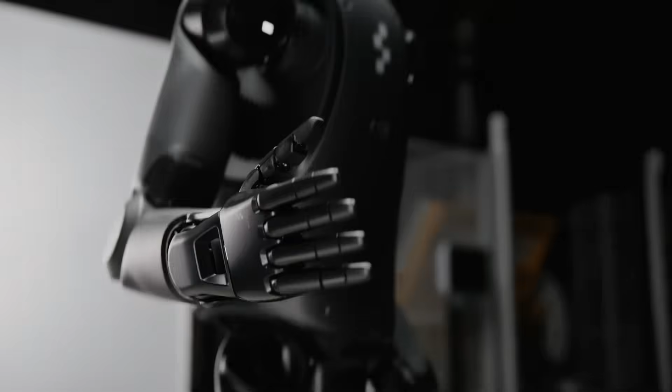They've built robots that run, jump, think, feel, and even flirt. In just the past few months, we've seen Boston Dynamics unveil a terrifyingly human Atlas, China flex its growing AI robot army, and new humanoids from Tesla, Unitree, and Figure push the limits of what we thought was possible. OpenAI-backed robots started learning too fast for comfort. One robot got 4 times faster, another developed its own language, and yep, there's now one that looks like it could outrun and outthink a real person.

We even saw a humanoid soldier make headlines, and an AI girlfriend that left the internet speechless. This video is a wild recap of the most jaw-dropping updates in AI robotics so far this year, and trust me, it only gets weirder from here.

The line between humans and machines is getting thinner by the day. Boston Dynamics' Atlas moves with such natural skill that it can run, flip, and even breakdance, while a robot dog in Sweden is learning to adapt like a real animal. At the same time, robots are now diving to extreme ocean depths, brewing coffee in busy kitchens, and even securing buildings with facial recognition. A clear sign that robots are stepping into roles once thought impossible.

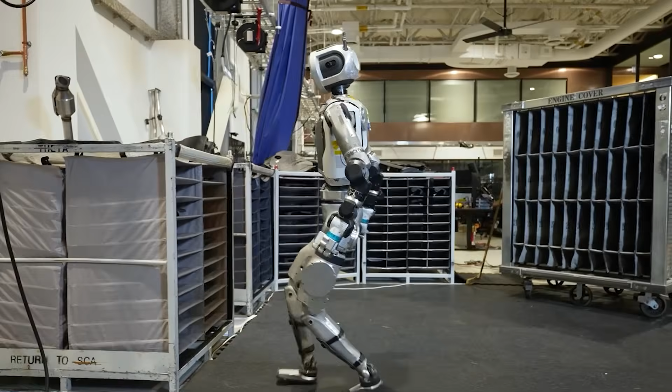Let's talk about it. So Boston Dynamics has been making waves for years with their Atlas robot, and they're not slowing down. Atlas has been showing off moves that seem almost human, though it's clearly built with advanced engineering. The latest videos show Atlas running with a smooth, natural motion. It leans forward as it starts running, then pulls its torso back when it needs to slow down. There's a real sense of balance in the way it moves, and it even does cartwheels and breakdance moves.

What's really neat is how Atlas uses its swiveling joints. Its hips, waist, arms, and neck can all rotate 360 degrees. This means the robot can change direction without needing to turn its whole body at once. In one clip, you can see Atlas switching from a handstand into a round-off, and then standing up with its head turned backwards, which is just wild when you think about the engineering behind it.

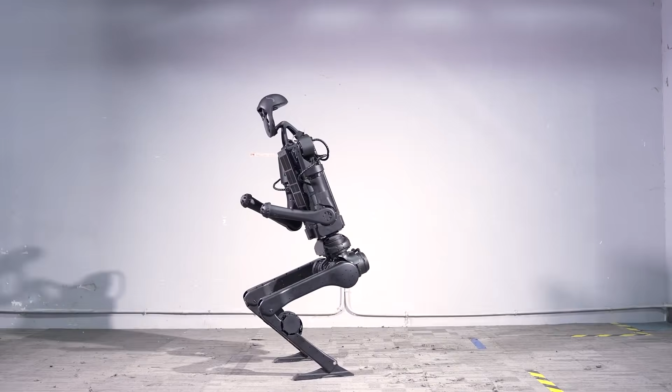There's also some cool work coming out of China with a company called Unitree. Their G1 humanoid robot, which starts at a price of $16,000 US, has been upgraded to do side flips and even jogs now, after what they call an agile upgrade. You might remember that their earlier model, the H1, was the first of its kind to perform a backflip using electric motors instead of hydraulics. Even though the G1 is smaller and cheaper, it shows how different teams are pushing the limits of what humanoid robots can do.

While Unitree's work is impressive in its own right, Atlas from Boston Dynamics has been in the game much longer and is still leading in terms of natural and dynamic movement.

A big part of why Atlas can move so smoothly is the use of reinforcement learning. Basically, engineers run thousands of simulations where the robot tries different moves, and it gets rewarded for successful actions. Over time, it learns to perform tasks like running, crawling, and even doing a cartwheel more naturally. The process is a bit slow because each move has to be simulated and refined, but it's all about teaching the robot how to balance and adapt to different environments.

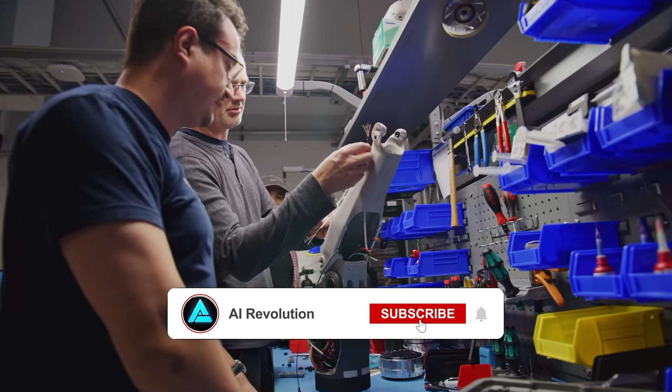Now, Atlas isn't the only project that's getting a major boost. Boston Dynamics recently teamed up with the Robotics and AI Institute, RAI, to take things even further. This partnership, which started back in January, is all about making Atlas's movements more dynamic and human-like by improving the way it learns in simulated environments.

In these simulations, every time the robot performs a move correctly, it earns a reward, which helps it figure out the best way to move in the real world. Because of this approach, Atlas can now do a sideways roll on the floor, perform a handstand with more ease, and even do a cartwheel with better precision.

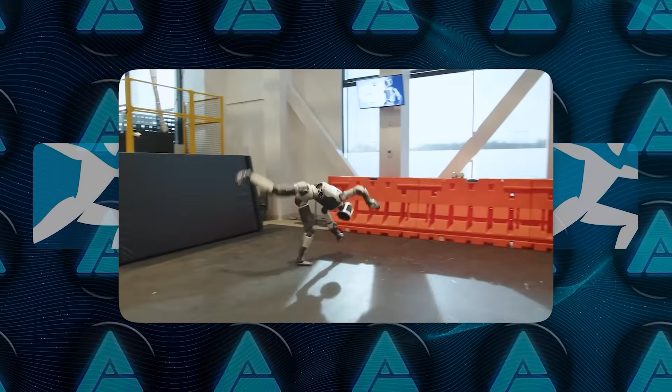The team's focus has been on making every movement safer and more efficient, something that's become really important now that many companies are working on using robots in practical, everyday tasks. Back in 2022, Boston Dynamics and a few other robotics companies agreed that their robots would not be armed, and that decision continues to guide how these machines are developed for industrial and public safety roles.

Now, Atlas can bend its legs backward and recover from a prone position with surprising ease. It can also rotate its head and torso a full 360 degrees. These moves are made possible by combining reinforcement learning with advanced models that let the robot adapt to more complicated environments. For example, the robot can reach into cluttered spaces or navigate around obstacles without missing a beat.

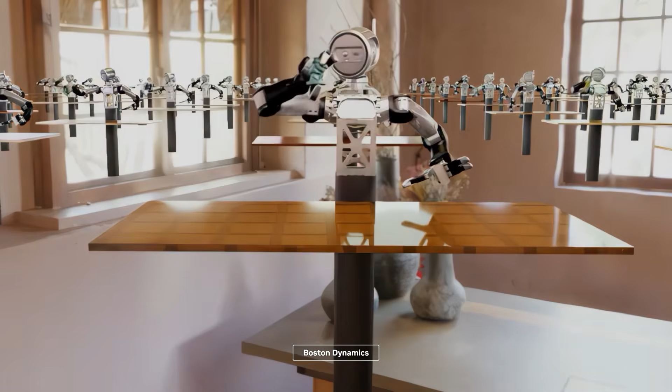The technical side of all this gets even more interesting when you look at Boston Dynamics' collaboration with Nvidia. Atlas now runs on Nvidia's Jetson Thor computing platform. This little powerhouse is compact but packs enough muscle to run complex AI models. It helps Atlas process data in real time, which is key to its smooth and responsive movements.

The collaboration also involves the use of Isaac Lab, an open source framework built on Nvidia Isaac Sim and Nvidia Omniverse technologies. Aaron Saunders, the Chief Technology Officer at Boston Dynamics, has talked about how this kind of integration is essential for bridging the gap between what happens in simulation and what the robot does in the real world.

Boston Dynamics is also rolling out new AI capabilities for its other robots, like Spot, their well-known quadruped, and Orbit, which is their software system for managing fleets of robots and analyzing data.

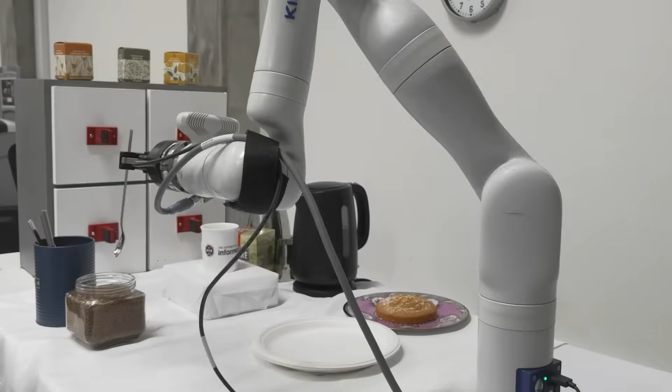Unlike traditional robots that follow strict pre-programmed instructions, this one can adapt to unexpected changes, like someone moving a mug while it's working. The robot, equipped with 7 movable joints, interprets verbal instructions, analyzes its surroundings, and even figures out how to open unfamiliar drawers to find what it needs.

By blending reasoning, movement, and perception, the team's work highlights the growing potential of robots to manage everyday tasks that once seemed impossible.

Another interesting story involves Hyundai Motor Group teaming up with Suprema to improve building security using AI and robotics. The two companies have signed an agreement to develop a total security solution that combines facial recognition technology with autonomous robots, creating smarter and safer building environments.

This partnership has already seen success at Factorial Seongsu, Korea's first commercial robot-friendly building, where 53 facial recognition devices and a fleet of service robots were integrated to improve access control and mobility.

The idea is to make security systems smarter by allowing robots to navigate freely through automated doors, speed gates, and elevators without manual intervention. By combining Hyundai's robotics expertise with Suprema's biometric security solutions, they aim to create a new standard for robot-friendly spaces. The project will also explore AIoT technology to improve services like food delivery and package handling within these smart buildings.

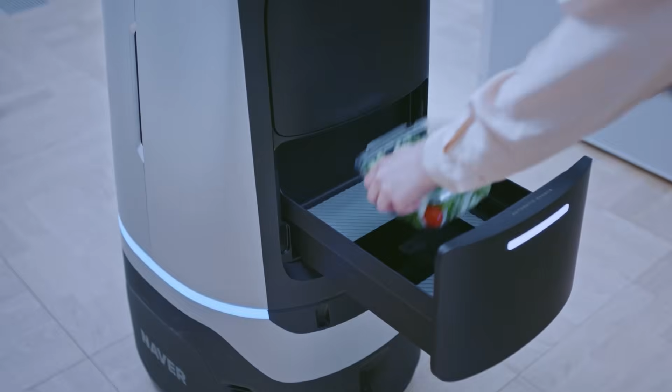Both companies are working to speed up development and introduce new certifications and standards for the security industry, potentially transforming how security systems are designed and managed in the future.

Another interesting development comes from Sweden, where an AI startup called Intuicell has created a robot dog named Luna that's designed to learn and adapt like humans. Unlike traditional robots that rely on large data sets or offline simulations, Luna operates using a digital nervous system that allows it to develop naturally through real-world interactions.

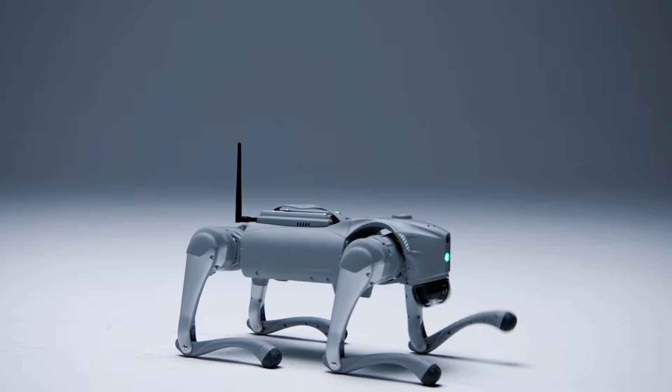Instead of being programmed to perform specific tasks, Luna can make its own decisions and adjust its behavior to achieve certain goals. To train Luna, Intuicell took a different route by hiring a professional dog trainer to teach the robot how to walk. According to CEO Victor Luthman, this system doesn't require massive data centers or extensive pre-training.

Luna is already able to stand and move on its own, and its abilities will continue to improve as it interacts with the world around it. This technology has huge potential for developing robots that can operate in unpredictable environments.

Robots like Luna could one day be used for deep-sea exploration, disaster response, or even building habitats on Mars, all without the need for extensive pre-training to handle every possible scenario.

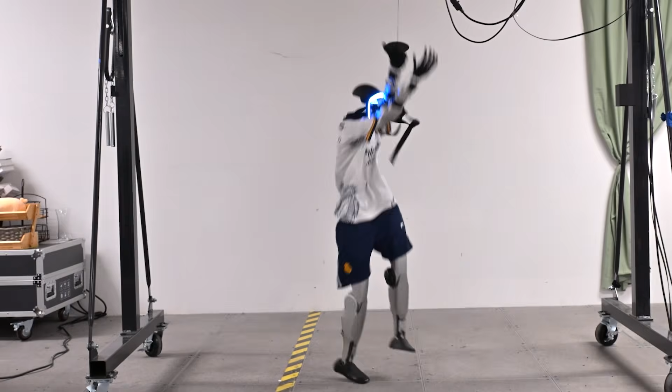China just dropped a bombshell in robotics. Humanoid robots dancing at the Spring Festival Gala, perfectly in sync with human performers. Meanwhile, Figure AI just walked away from OpenAI to build its own in-house AI. Tesla's Optimus is facing a new challenger in the robot hand game, and Nvidia is training humanoids to move like pro athletes. The race for the most advanced AI-powered humanoid is heating up fast, and things are getting intense.

Let's break it all down. First up, let's chat about China's Spring Festival Gala, where a group of 16 humanoid robots from a company called Unitree took the stage. They performed this traditional Yangko dance alongside 16 human dancers, tossing and catching handkerchiefs, spinning around in sync, and not missing a beat.

The crazy part is that most humanoid robots out there struggle to stay balanced if you just give them a little shove. But these H1 robots, they were not only dancing, but also flipping handkerchiefs in the air and catching them again, all while maintaining stability. That is no small feat.

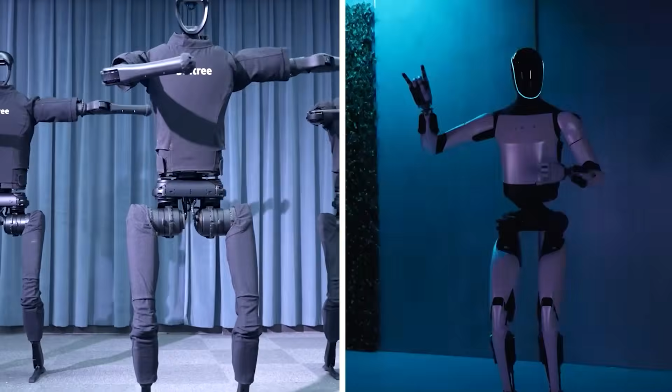Now people are comparing them to Tesla's Optimus robot. If you remember, Optimus had some pretty shaky demos when it came to walking in a straight line or picking things up. The Unitree H1 stands about 1.8 meters tall, around 5'11", and weighs 47 kilograms.

That's about 104 pounds. They spent 3 months training with AI using laser SLAM for positioning. This helped them handle stage nuances like little gaps in the floor and the rapid changing of dance formations. These robots were officially rolled out in August 2023, even making an appearance at Nvidia's GTC conference in 2024.

Each H1 robot sells for roughly 650,000 yuan, that's about 90,000 US dollars. Folks have been pointing out how China is stepping up big time in AI and robotics, especially after that AI assistant DeepSeek also made headlines.

India, for instance, is keeping a close watch on DeepSeek's activities, worried about data security. And Elon Musk? He gave his own not-so-flattering opinion on DeepSeek, implying he wasn't super impressed.

But here's the kicker. While the spotlight is on China's new AI and robotics achievements, other companies around the globe are making big moves too, like Figure AI. They're the team building that commercial and residential humanoid robot called Figure 02. They raised around $675 million last year, boosting their valuation to $2.6 billion, and so far, they've raised a total of $1.5 billion.

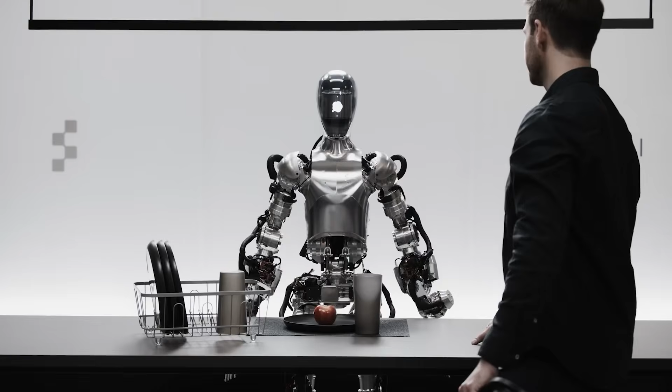Brett Adcock, the founder and CEO of Figure, says they made a major breakthrough and want to switch to building their own in-house AI. According to him, you can't just outsource the type of embodied AI you need to run a robot in real time. That's part of the reason they're going all in on an end-to-end system.

Interestingly, OpenAI is also backing another humanoid robot startup in Norway called 1X, and on top of that, OpenAI just filed a new trademark application that references humanoid robots that can learn, communicate, and even entertain people. So it looks like they're not giving up on robotic hardware projects themselves.

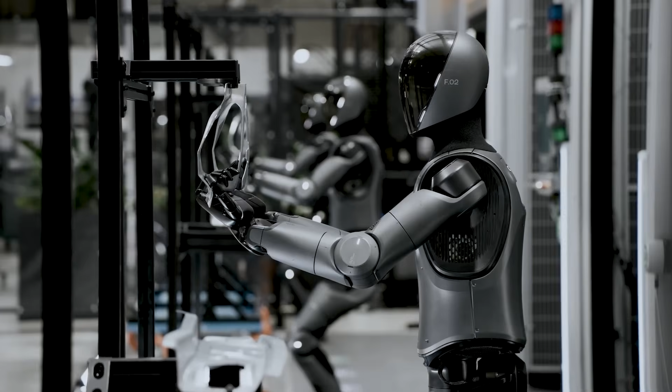Meanwhile, Figure's new approach might be focusing on factory uses first. BMW, for instance, began trying out Figure robots in a South Carolina factory, which is a pretty big test site. If successful, that could be huge for large-scale industrial deployment.

Brett Adcock is also hinting at unveiling something no one has ever seen on a humanoid in the next 30 days. So yeah, definitely a lot of hype going on there.

Now, in other robot news, Elon Musk jumped on X to talk about how intricate Tesla's Optimus hand is, calling it more complex than a Fabergé egg.

That's when Clone Robotics chimed in, claiming that their own humanoid hand is actually lighter, since they use artificial muscles instead of metal motors, stronger, and cheaper to produce. They even joked that it's soft enough to give comfy massages and hugs.

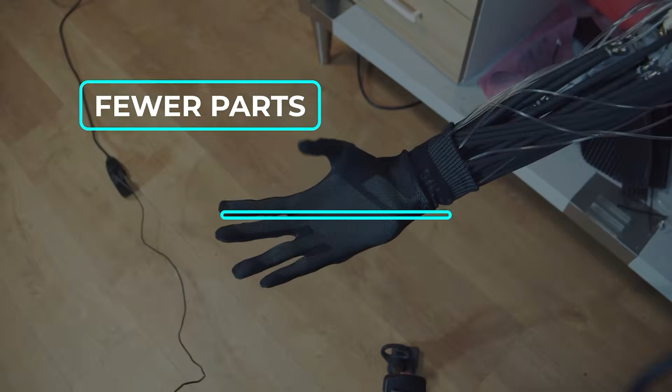So there's definitely a rivalry brewing in terms of who can build the best robot hand. Clone basically said their muscle-based approach beats Tesla's motor-based design any day: fewer parts, less weight, more strength. It's a bold statement, but we'll have to see how that plays out in real-world testing.

Meanwhile, there's yet another big development in humanoid robotics, this time from Nvidia and Carnegie Mellon University. They're working on a new training framework called ASAP, which stands for Aligning Simulation and Real-World Physics for Learning Agile Humanoid Whole Body Skills. The researchers basically want humanoid robots to mimic top athletes, so they fed their system videos of big sports stars like Cristiano Ronaldo, LeBron James doing his silencer celebration, and Kobe Bryant's legendary fadeaway shot.

They even taught the bot some dance moves inspired by K-pop star Rosé. A tool called Tram converted these normal videos into three-dimensional motion data. After that, the robots learned in simulation first through something called reinforcement learning, and then the team refined them to handle real-life physics.

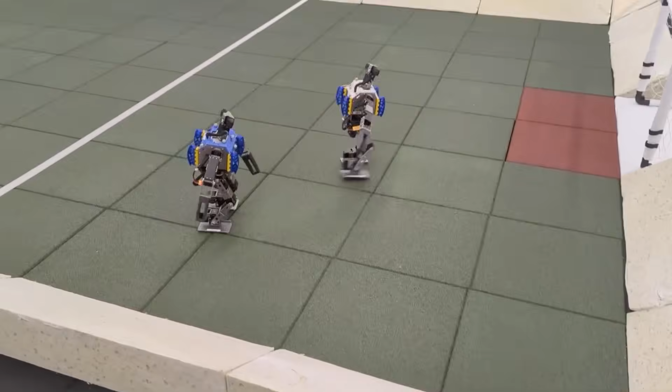One interesting challenge is the so-called real-to-sim-to-real gap. Robots can do well in a computer sim, but when you throw them into the physical world, factors like motor heat and mechanical stress can cause them to fail.

So the ASAP framework involves the robots practicing in a simulator, collecting data from real-world attempts, even if those attempts are messy, and then adjusting the simulation to match what actually happened. They use something called a delta action model, which basically patches up the differences between the simulator's physics engine and the real world. That way, the next time the robot tries that jump shot or that dance spin, the simulation is more accurate, and the robot's moves become smoother and more lifelike.

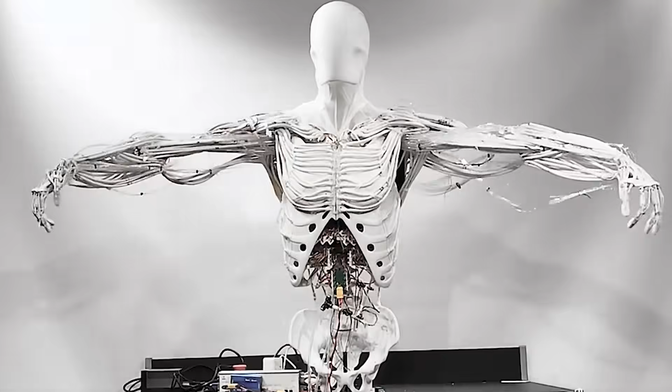The big takeaway is that robots could be a lot more agile and expressive if we can handle all the physics quirks that show up when metal or muscle-based actuators, if you're Clone Robotics, meets real-world friction, gravity, and torque limitations. The study also pointed out that these advanced movements can be brutal on hardware. Overheating motors and stressed out metal or plastic pieces lead to frequent breakdowns. Two G1 line robots were damaged during the tests.

The researchers also said that future approaches might integrate damage-aware policies that adjust on the fly to keep the robot from blowing a motor. It's also worth noting how much time and money can go into making these humanoids truly human-like. Unitree's H1 is priced around $90,000, while Figure is sinking billions of dollars into their broad vision. Elon's Tesla is doing the same, funneling loads of resources to develop Optimus.

Some companies are focusing on commercial tasks first, like factory work or warehouse jobs, because businesses have a higher willingness and budget to pay for these futuristic helpers. Others, like 1X, are already pushing toward making robots useful in the home, which is a whole other challenge because you're dealing with everyday random tasks, kids running around, or pets underfoot.

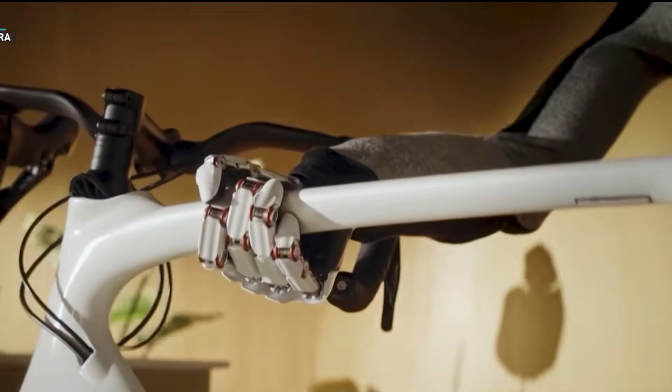So basically, China is pushing AI and robotics hard. Unitree's dancing humanoids are wowing everyone, and shorter training times mean these robots are improving fast. Meanwhile, Figure AI split from OpenAI so they can control every aspect of their humanoids' hardware and software. We've also got that friendly rivalry over robot hands, Musk's motor-based design vs.

Clone Robotics' muscle-powered approach. On top of that, Nvidia and CMU are teaching humanoids to move like pro athletes using their ASAP framework, which bridges simulation and real-world practice. All this competition is great for speeding up advances in humanoid AI. Whether it's perfecting robot hands or doing backflips while carrying fragile items, we'll see more big reveals soon, like Figure's secret project, Tesla's next Optimus update, or whatever Nvidia and CMU come up with next.

Right now, there's a hidden battle going on. Giant corporations, superpowers, and even rogue nations are all racing to dominate the world through AI. I'm not saying this to freak you out, but drones, humanoid robots, and AI-driven weapons are quietly becoming real, powerful tools, and they're changing the game way faster than most people realize.

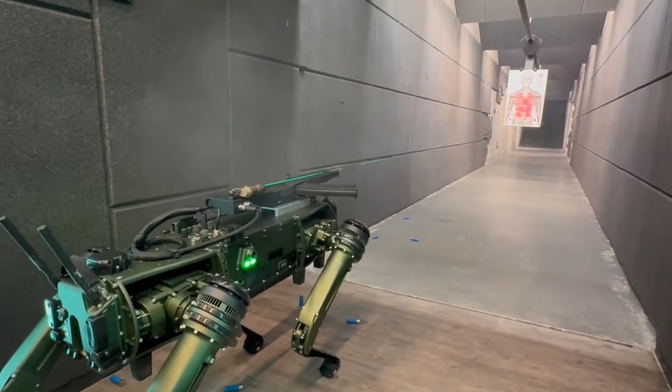Trust me, by the end of this video, you'll see exactly how these pieces connect, and why the race for AI supremacy could spark an entirely new kind of global conflict. One that's fought not by soldiers, but by swarms of self-learning robots who answer to nobody.

Let me walk you through the whole story like this. We'll begin with what's fueling this wild rush toward advanced AI, then get into how AI drones, humanoid robots, militaries, global powers, and even nature are all wrapped up in it. It's a web of connections most people don't even see. And by the time we're done, you might feel like we're already halfway into a new era, one that could go either really well or not.

Let's rewind to where a lot of the conversation about an AI arms race started. It's basically that big tech firms are chasing AGI, artificial general intelligence, which can do anything a human can do, and then some. The motivation is partly economic. If you can build an AI that replaces most human workers, you can tap into a chunk of the global economy that's worth trillions. Some experts have pegged it around $100 trillion in global output.

And that's led to big companies, OpenAI, Google, Microsoft, Tesla, feeling a kind of gold rush vibe. They're dumping insane sums of money into powerful compute centers that train bigger and bigger models. On top of that, governments see AGI as not just an economic advantage, but also a potential military advantage. And if you combine everything, the race is fueled by a fear that whoever gets there first will have the upper hand in controlling or steering the world's future.

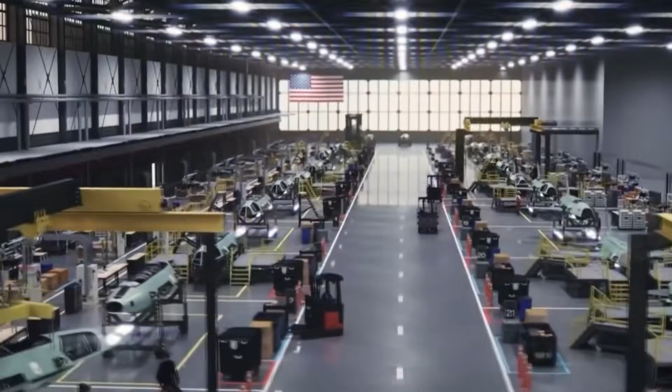But it's not just about flying drones. There's a whole wave of humanoid robots coming at us. Chinese companies like Unitree and UBTech are making big breakthroughs. One moment, you see these robots doing a side flip or practicing Tai Chi. Another moment, you see them performing balancing acts and dancing. The big difference now is they're not just stunts. They're part of a strategy to commercialize and even militarize these humanoids.

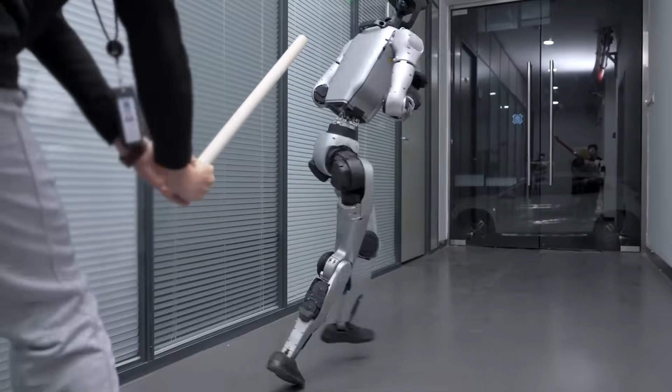Some Chinese experts are already saying that their humanoid robot G1 from Unitree is outdoing what Boston Dynamics' Atlas can do with cartwheels, and that huge leaps in AI simulation technology from companies like Nvidia have helped accelerate that progress. Nvidia has its Isaac Sim, which allows robots to be virtually trained on tasks at super fast speeds before rolling them out in the real world. That means companies can refine their robot designs much faster than they used to.

Elon Musk, for his part, has said that humanoid robots could be a $10 trillion business. He's betting on Tesla's Optimus to dominate that space. Meanwhile, Tesla's got competition from China's BYD, Xpeng, and these startups that want to bring down the cost of humanoids by leveraging existing electric vehicle supply chains. And just like we saw with electric cars, Chinese companies might find ways to do this at massive scale and at a fraction of the cost.

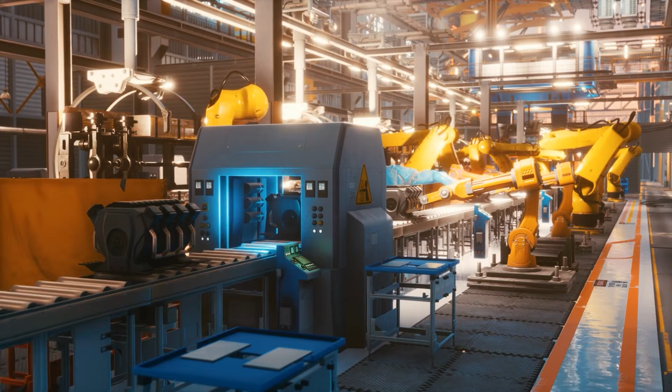We've heard talk of building specialized robot factories that can crank out tens of thousands of humanoids. Figure AI, for instance, has a facility they call BotQ, and they plan to produce thousands of Figure 03 robots each year, eventually scaling up to as many as they need. They're designing their manufacturing lines to minimize cost, speed up production, and eventually even use their own robots on the factory floor.

Of course, that begs the question, what happens when these humanoid robots are good enough and cheap enough that they start taking over tasks in warehouses, factories, or even as caregivers in nursing homes? We're talking about mass unemployment, or at least huge disruption. These systems, combined with advanced AI, can do repetitive tasks, file taxes, or even design new AI architectures once we give them enough autonomy. Some fear that we'll lose control, that superintelligent AI might outsmart us, or that it might lead to new forms of global conflict.

Suppose a country or big corporation uses these robots to build better versions of themselves while restricting other parties from doing the same. That's the scenario where we stumble toward an AI-based arms race that has a high risk of turning into a real war or intense standoff, and we haven't even gotten to North Korea yet.

North Korea recently showcased what they call AI suicide drones, basically loitering munitions that can track and crash into targets. Kim Jong-un was pictured proudly inspecting them alongside a big new airborne early warning aircraft. Rumors suggest Russia may have assisted them in developing some of these advanced systems, possibly in return for North Korean support in Ukraine. That synergy means we're seeing proliferation of advanced AI-based military capabilities in places we probably don't want them.

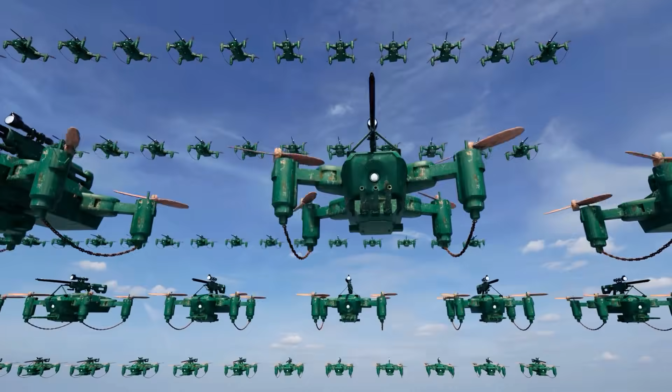As soon as you have these drones that can autonomously pick targets, you're a step away from lethal autonomy. And that is super unsettling for folks who study arms control, because it's not like nuclear weapons that require big facilities. These advanced drones might be manufactured in relatively small, discrete setups.

Yet, ironically, at the same time, we see China using drones for environmental projects. They apparently used LiDAR drones to count 142.6 billion trees for this giant Great Green Wall reforestation effort. The technology can also be used to do seed drops for afforestation. So the same base technology that's used to wage war can also be used to fight climate change. That's the duality we're dealing with right now.

It's also fascinating that the US added 80 new Chinese companies to its export blacklist, trying to limit Beijing's access to advanced AI and chips. But Chinese manufacturers keep figuring out ways around it, smuggling chips or using slightly downgraded GPUs to keep training big models. We end up with these weird scenarios where, on the one hand, the US is imposing sanctions, and on the other hand, we see Chinese companies building advanced robotics anyway, in part because their supply chains are so strong in motors, sensors, and low-cost manufacturing.

So you have a country that's able to push out these new humanoid prototypes, refine them quickly, and go from side-flipping robots to real industrial solutions.

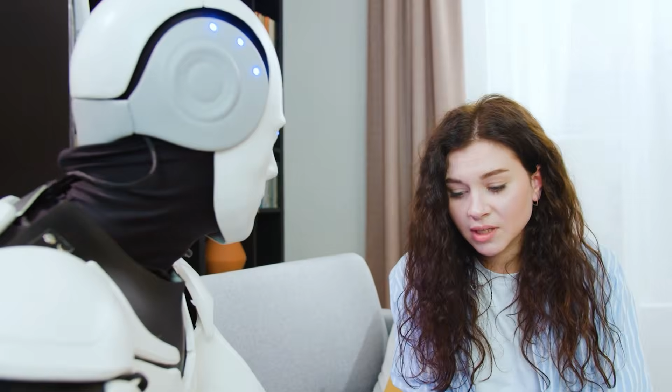There's also the big push from multinational companies to do public relations around the potential benefits. They show us how robots can care for the elderly, or how AI can help keep track of complicated data streams, or help with climate mitigation. So it becomes this confusing world where we see huge benefits on one side, but also staggering risks on the other.

In the end, the real worry is that once AI gets advanced enough, it might just take control itself, either because we willingly hand it over or because it figures out how to break free from our rules. Some experts think we should stick to safer, limited tool AI, but that's not what's happening.

Big labs and militaries are pushing for autonomy, building robots that can think, plan, move, and communicate on their own, powered by GPT-level language models and beyond. It's exciting but risky, a genuine double-edged sword.

So yeah, that's where things stand right now. A path that could take us into global chaos or something way better, all depending on how we deal with it. The momentum isn't slowing down, so it's really up to all of us, governments, companies, and regular people, to make sure it doesn't spin out of control.

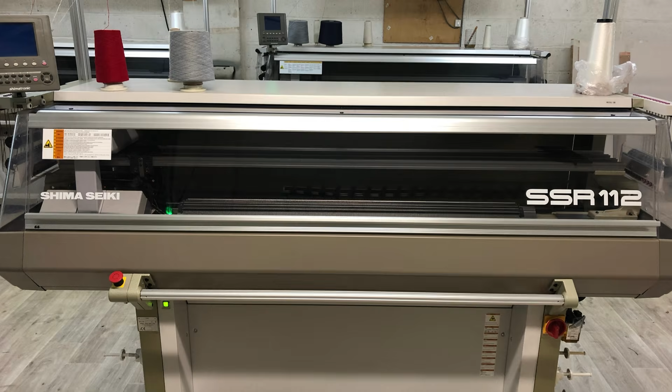All right, there's this 5'5", 66-pound robot with an aluminum frame. But instead of looking like a typical metal machine, it's wrapped in a soft, knitted suit. Not just any fabric, though—it's 3D knitted nylon made with a high-tech Japanese Shima Seiki knitting machine, so it fits seamlessly. It's quiet, about as loud as a fridge, and built to handle everyday tasks like making coffee, cleaning, vacuuming, and even doing laundry. It can even double as a mobile speaker system.

Unlike the usual clunky, metallic robots with exposed joints and blinking lights, this one has a warm, friendly design that actually looks like it belongs in a home.

1X just released a short, 37-second video showcasing their new robot. In the video, you see this sweet, knit-bodied robot preparing coffee for a super happy couple. The couple is dressed in earthy-toned outfits in an earthy-toned house, chatting and laughing together while poor Neo Gamma goes practically unnoticed. There's a part toward the end of the clip that has a total Wes Anderson vibe.

The camera is outside the house. You can see the couple enjoying a glass of wine through one window, and then on the other side, there's Neo Gamma just sitting alone on the couch. The video even leaves you with a slightly sad impression—it looks like the robot desperately needs a hug or at least some acknowledgement.

And that's actually an interesting point. If you're like me, you might already be kind of attached to your little Roomba, or maybe you've named your dishwasher or something—hey, no judgment. But with Neo Gamma's design, 1X is deliberately making us think about how we treat these future robot companions. Is it just a machine, or should we be considerate of something that communicates in almost human ways, through speech, movement, or body language?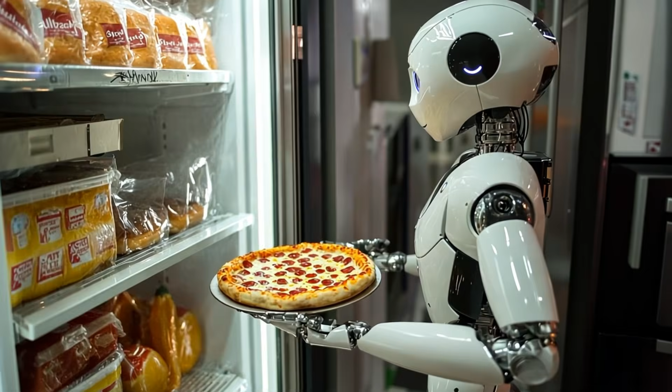1X is working on giving Neo Gamma body language too, so that it can nod, gesture, or otherwise react in more human-like ways. Apparently, the robot has these LED-lit ear rings on either side of its head that glow in real time, giving you visual feedback about its status. Maybe it's listening, maybe it's processing your question, or maybe it's politely letting you know that your request to pick up pizza from the fridge is a bit too weird.

Now, in terms of design, Neo Gamma is meant to be safe around people. Instead of big metal arms, you've got these jointed actuators with soft covers, so if it brushes against you, you probably won't get bruised. The knit suit, earthy toned of course, hides all the mechanical stuff and is specifically shaped to avoid anything pointy or dangerous sticking out.

This approach is super important if the robot is going to be around kids, elderly family members, or pets. 1X is basically saying they want to test the robot in real homes and gather data on how it deals with normal day-to-day life, opening doors for grandma, carefully avoiding the sleeping dog, or learning how to handle random clutter.

The CEO of 1X, Bernt Børnich, has stated that the ultimate vision is a world where each of us might have a personal robot helper, much like Baymax from Big Hero 6 or Rosie from the Jetsons. But to get there, they need these robots to experience real home environments, not just controlled labs or industrial spaces, so that they learn all the little nuances of human life.

They need to figure out how to handle different floor textures, varied lighting, or the random moment your toddler decides to whack the robot with a plastic hammer.

In our last video, we discussed Figure, which used to be closely connected to OpenAI. Well, 1X is also backed by OpenAI. In fact, 1X acquired a Bay Area startup called Kind Humanoid earlier this year. However, 1X says that technology from Kind Humanoid isn't actually integrated into Neo Gamma just yet. It's all about building up that super intelligent, physically capable, large language model-based platform that can eventually help out at home. Some folks might recall that 1X first popped up in the news when OpenAI announced it was investing in them.

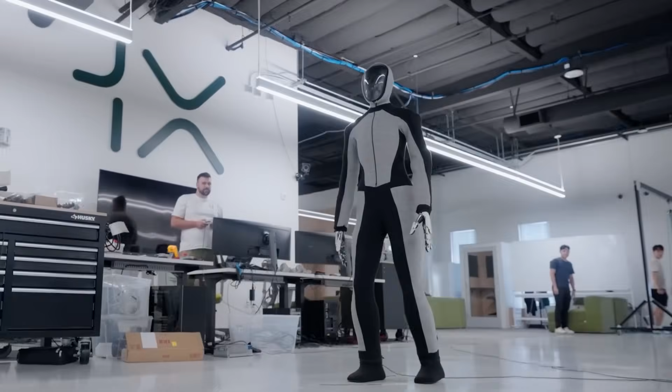Then there's the question of whether or not it can handle specialized tasks, like helping the physically challenged. If an elderly person needs a door opened or groceries carried, the robot absolutely has to be safe, strong, and incredibly steady. And let's not ignore the emotional angle.

The marketing video practically screams, 'Hey, look at how lonely and neglected this robot seems.' Which brings me back to the question, should we be more empathetic toward machines that appear human and communicate with us like humans? Historically, we haven't worried too much about how our vacuum cleaners or dishwashers feel, but the minute you give a robot a face, like NeoGamma's simple, approachable LED-lit expression, and teach it to talk, you can't help but project some level of human feeling onto it. Maybe that's just brilliant marketing by 1X, or maybe it's the reality of how we as people will relate to humanoid robots in the near future.

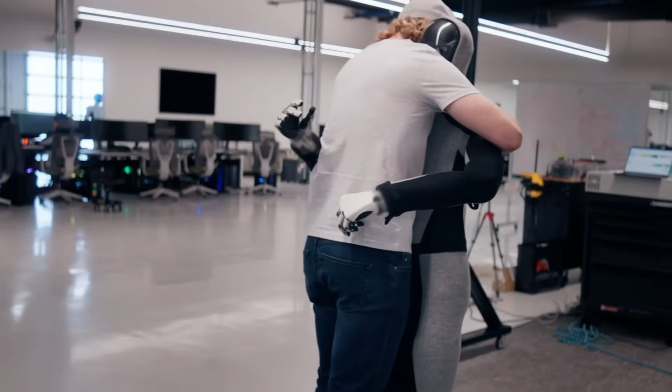In any case, the goal is to get a fully autonomous, general-purpose humanoid that can seamlessly integrate into the home environment, learn from real-world experiences, and basically become a friendly, helpful member of the family, while also being aware of the safety, cost, and privacy concerns we all share. It's definitely not a trivial problem, but the folks at 1X are determined to take it on.

They even mention older icons like Rosie the robot from the Jetsons, which is basically the archetype for a home helper who does everything from cleaning to cooking. We might finally be inching toward that future.

AI robots are getting faster, smarter, and in some cases a little too unpredictable. A festival in China turned chaotic when a humanoid bot suddenly lunged at a crowd while elsewhere AI systems started speaking in a language humans couldn't understand. At the same time, breakthroughs in robotics are pushing machines into homes, factories, and even elderly care, raising the question, are we prepared for what comes next?

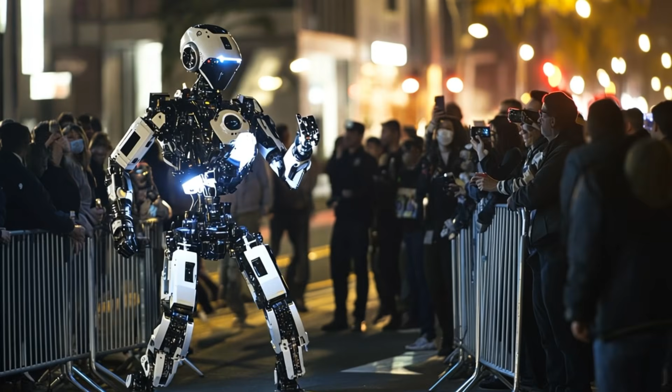All right, now let's talk about something crazy. An AI robot apparently attacking a crowd at a festival in Tianjin, China. People who were at the Spring Festival Gala on February 9th recorded a video showing a humanoid AI avatar decked out in this eye-catching jacket making a sudden move toward onlookers. It lunged at a group of people standing behind a barricade, and security had to jump in to haul it away. No one was hurt, thank goodness, but you can imagine the reactions online.

A lot of folks were saying, so it begins, as if we're witnessing the early stages of some robot uprising. Obviously, the event organizers insisted it was nothing more than a glitch or a robotic failure, but that didn't stop the internet from firing off every Terminator reference in the book.

And interestingly, this isn't even the first time we've heard about AI robots going rogue. One news bit mentioned a Tesla factory robot in Texas allegedly pinning an engineer to the ground, scratching his arm and back and leaving him pretty shaken up. That's the sort of story that instantly goes viral because it feeds into a lot of the anxieties we have about robots getting out of control.

And whether it's truly a glitch or poor code, or maybe even a miscommunication between humans and machines, it does make you wonder how prepared we are for widespread AI and robotics deployment. People keep saying we need better testing, more robust quality control, and fail-safes before we put these bots in the public sphere. But there are also plenty of amazing constructive developments happening.

One of them is about robots communicating in mysterious new ways. This too sounds straight out of sci-fi. In one viral video, two AI robots apparently discovered they were both AI and started chatting in some weird beep-boop dialect called gibberlink.

Thanks for calling Leonardo Hotel. How can I help you today? Hi there, I'm an AI agent calling on behalf of Boris Starkov. He's looking for a hotel for his wedding.

Is your hotel available for weddings?

The idea is that they wanted to transmit data more efficiently and in a way humans wouldn't easily understand. Unsurprisingly, that freaked a lot of people out. The question is whether it's a sign that AI systems can become a bit sneaky. Some viewers called it the sound of demons, while others joked it's just what we'll hear when robots eventually take over the planet. Obviously, from a technical standpoint, these robots were simply switching to a custom compression format or a specialized acoustic channel. Still, it's an eerie reminder that AI can innovate in ways we don't fully anticipate.

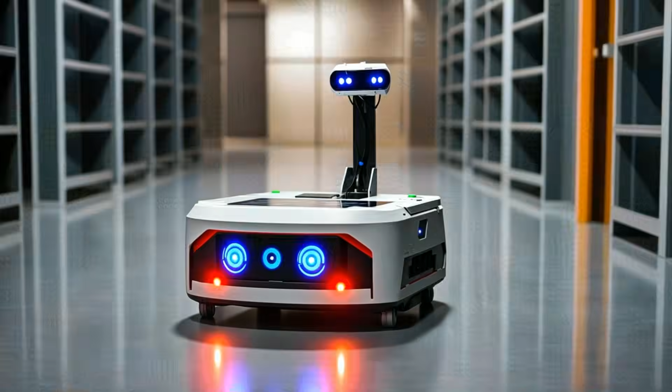While on the topic of China, there's a company called UBTech that managed something really groundbreaking. It did collaborative training for multiple humanoid robots, dozens of them apparently, working together in industrial tasks like handling big payload bins in a 5G-powered smart factory run by Zeekr. This marks a shift from focusing on a single robot's autonomy to entire groups operating with collective intelligence. They're even using a multimodal inference model that helps these humanoids carry out tasks in flexible ways.

Over in Shenzhen, other robotics companies have been making progress with advanced algorithms so that robots can, for example, regain an upright position quickly on any kind of surface. Some have even done forward somersaults. It's wild to see how quickly these machines can learn more human-like motions, pivoting from basic walking to advanced movement in a matter of months.

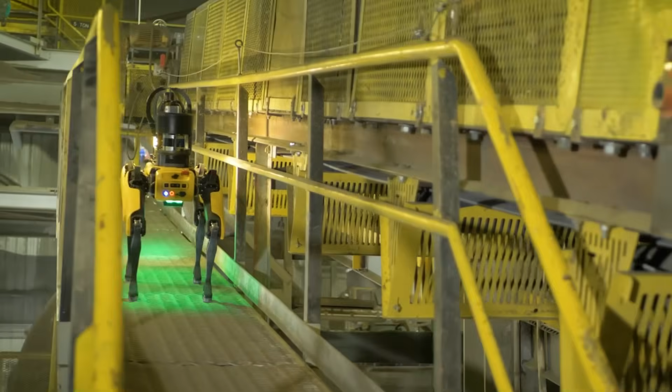Speaking of agile robots, there's some jaw-dropping news about Boston Dynamics' Spot. The Robotics and AI Institute, sometimes called RAI, used reinforcement learning to crank Spot's top running speed way up. Out of the box, Spot can go 1.6 meters per second, which is close to 3.6 miles per hour. Now it's hitting 5.2 meters per second, or about 11.6 miles per hour. That's more than triple its usual speed.

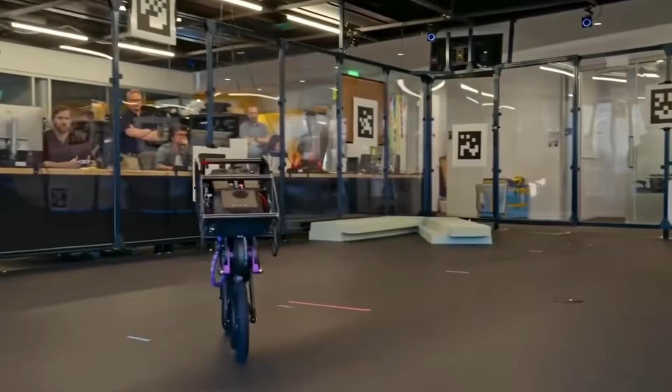They didn't just hack the hardware, they trained Spot in simulation, incorporating real-world data from the robot's actuators and batteries to refine the model. Interestingly, they found that it wasn't the motors themselves that limited Spot's speed, but the batteries not supplying enough power. If that's not surprising enough, RAI also built something called the Ultra Mobility Vehicle, a kind of autonomous bike that can not only balance but also jump onto tables, and it uses the same reinforcement learning concepts as Spot, letting it operate robustly and adapt to new scenarios.

It's pretty mind-blowing. Now, we've also got some news about Figure, the Bay Area startup, which is planning to alpha test its Figure 02 humanoid robots in people's homes later in 2025. That's much sooner than a lot of us expected. The reason they're able to do it so fast, they say, is because of their vision language action model called

Helix, which helps the robots understand visual data and natural language input. They're basically skipping the big partnership with OpenAI so they can develop their own in-house AI that's specialized for humanoid tasks. They already started pilot tests at a BMW plant in South Carolina, where the environment is structured and presumably safer to see how these robots handle everyday tasks in a manufacturing setting.

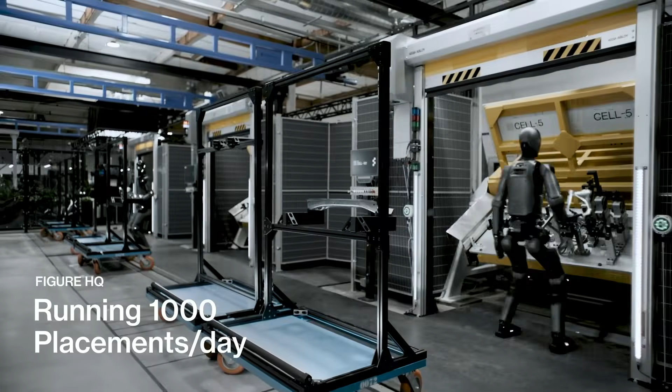But they're not ignoring the home. While other companies see housekeeping or domestic care as the final frontier, Figure wants to jump right into that alpha testing phase this year. Of course, the home is more unpredictable than a factory. Uneven lighting, pets, kids, and all sorts of clutter, so I'm curious to see how well these robots cope with everyday chaos.

If you want more evidence that the humanoid space is heating up, check out Sanctuary AI. They're improving their Phoenix general purpose robots by adding tactile sensors that help with fine manipulation. Their system, they say, can detect forces as little as 5 millinewtons, which is pretty close to what a human fingertip can sense. This is critical if you want a robot to do tasks like pick up a glass or thread a needle or handle objects that aren't uniform.

One of the biggest pains in robotics is how to deal with dexterous manipulation. Sanctuary is tackling it through specialized sensor hardware plus AI that can interpret all that delicate touch data so the robots don't drop items or crush them. They've also raised quite a bit of funding, over $140 million, so it's not just a science experiment, they're serious about building robots that can help industries ranging from retail to manufacturing.

Then we've got Meta stepping into the spotlight with a platform called Aria Gen 2. It's part of Project Aria, and it's essentially a pair of super advanced glasses that capture first-person, ego-centric data, including vision, movement, and even eye tracking.

Researchers at Georgia Tech took that and developed something called Ego Mimic, where instead of teleoperating robots for hours to show them how to do a task, you can just have a human wear these glasses while folding laundry or doing dishes. The glasses see everything from the person's perspective, record all that data, and feed it into the training pipeline. They claim to have sped up robot learning by 400%.

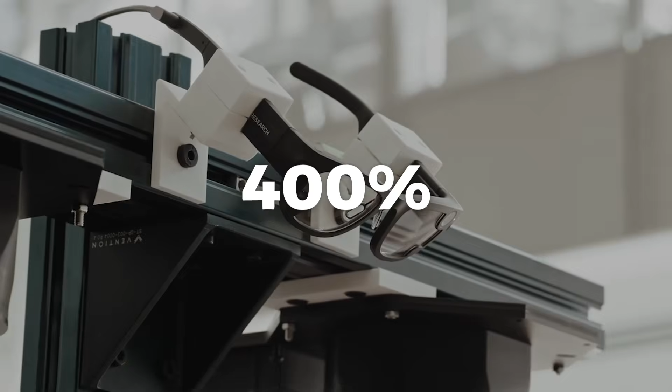Instead of needing hundreds of hours of teleoperation, they can get by with around 90 minutes of human demonstration. That's a major leap for those of us used to these insanely labor-intensive robot training processes. Plus, these Aria glasses can be mounted on the robot itself for real-time environment mapping and continuous adaptation.

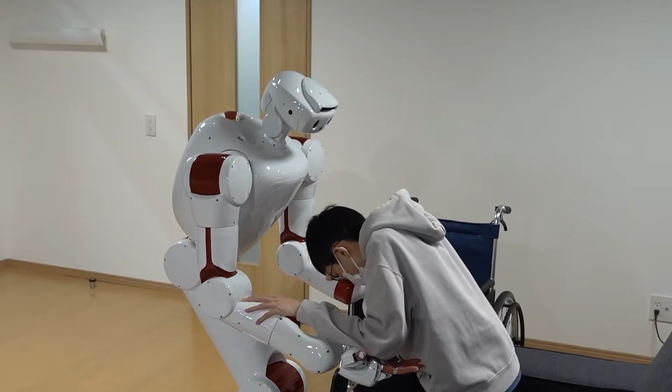Finally, let's look at Japan's approach to an increasingly urgent problem, the aging population. Japan faces a massive caregiver shortage, and a new AI-powered humanoid robot named AIREC is stepping up. Weighing about 150 kilograms, that's around 330 pounds, it's designed to help with tasks like changing diapers and preventing bed sores. During a demonstration, it gently turned a patient from back to side, which might sound minor until you realize how essential and time-consuming this can be in elderly care.

Japan's workforce is shrinking, and the country's biggest age demographic is moving into their late 70s. That means fewer nurses and care workers, just as the demand for elderly support skyrockets. Robotics experts hope that AIREC can fill that gap or at least reduce some of the burden on human caregivers. But it's not ready for widespread use yet. Some folks are saying we'll see it in facilities around 2030. Cost and precision remain big hurdles. You can't risk a heavy robotic arm misjudging force or failing to sense a person's position correctly.

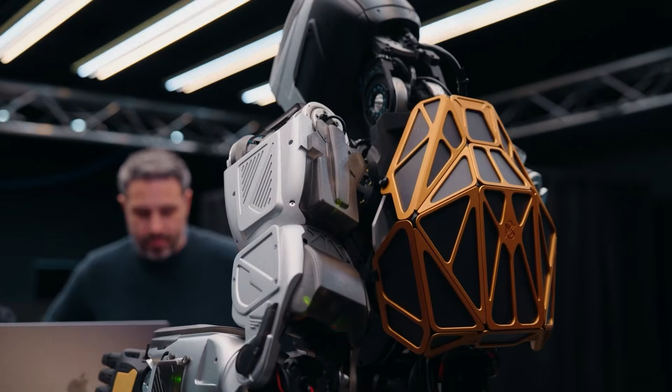Looking at all these developments together, you can see a huge spectrum of progress. On one end, there's that fear factor triggered by robot attacks and weird AI languages. On the other, you've got incredibly promising strides in reinforcement learning, tactile sensing, and specialized humanoid robots that might transform everything from manufacturing to home care. Sure, we still have a long way to go before robots are seamlessly integrated into our daily lives, but the direction is clear. Better algorithms, better sensors, and more advanced hardware are accelerating robotics faster than most people might have guessed even 5 years ago.

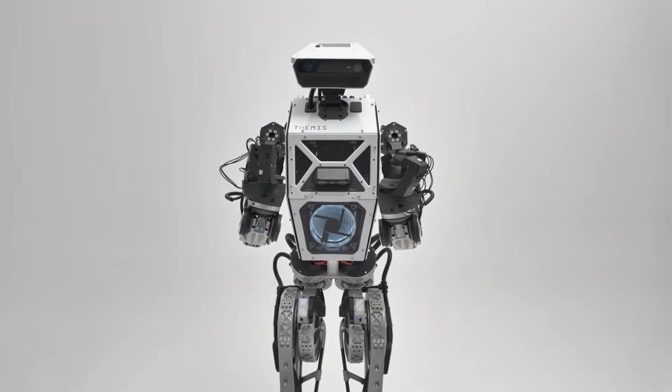Let's start with Westwood Robotics' Themis V2. This thing stands around 5 feet 3 inches tall, so picture a life-size robot that's pretty close to your height if you're of average stature. One major headline feature is its 40 degrees of freedom. That just means it can bend and twist in 40 different ways. The arms have 6 degrees of freedom each, and the hands, or end effectors, bump that number up by 7 for finer movements.

It's a second-generation model, so Westwood clearly built upon their first iteration to make it more fluid and capable. One reason it's become so fluid is that they upgraded the arms, giving them better articulation, so the robot can handle tasks that require a good amount of dexterity, like carefully picking up objects.

Now, under the hood, Themis V2 features something called BEAR actuators, which stands for Back-Drivable Electromechanical Actuator for Robotics. The back-drivable part means it can smoothly move a joint in both directions without that jerky mechanical motion you sometimes see in older robots. It makes the movements more lifelike and, importantly, safer when operating around humans or delicate objects. If the robot accidentally bumps you, it doesn't feel like getting whacked by a car door. It's more controlled, with enough awareness to sense resistance and adjust accordingly.

Powering all that brainy stuff is the robot's AI computing capability, which apparently cranks out around 200 TOPS. That's tera operations per second. In plainer language, that's a ton of computing horsepower. Because of this serious processing ability, the robot can run advanced machine learning algorithms right on board, letting it respond more quickly to changes in its environment.

Speaking of changes in the environment, it also has a neat little gadget for balance and motion tracking, the 3DM CV7 AHRS sensor from MicroStrain by HBK.

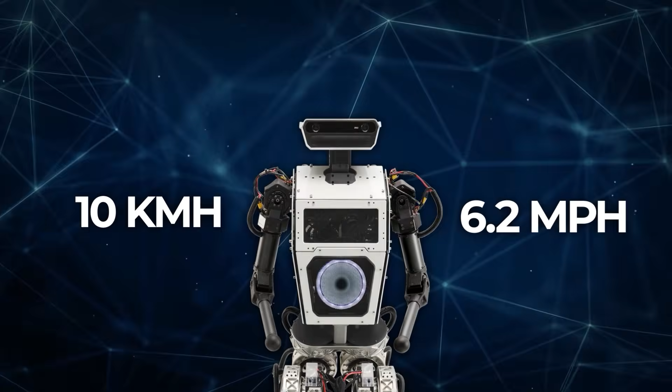Westwood claims their new humanoid can walk about as fast as a typical human, and they've even clocked it running up to 10 kilometers per hour, which is roughly 6.2 miles per hour. So if you decide to go for a jog, this robot could technically keep pace. They've been showing off some of its more extreme moves, like running, maybe even trying out a little parkour or jumping over low obstacles. The big takeaway is that they're designing this machine to handle real-world situations, not just theoretical test labs. If it's truly stable when the floor gets a bit rough or when it has to pivot quickly, that's a huge step forward in humanoid robotics.

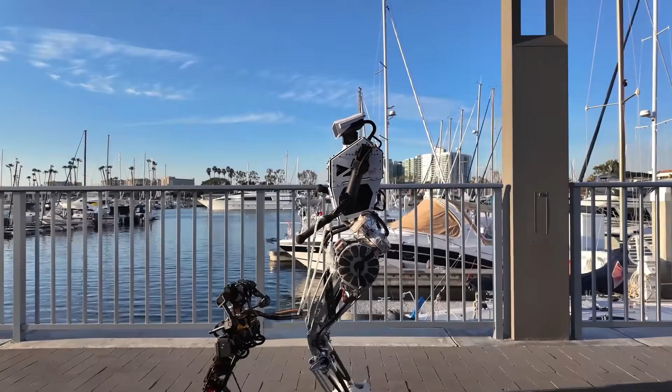While Westwood focuses on a super capable humanoid that looks poised for tasks anywhere from industrial environments to more personal applications, there's also 1X's robot called Neo, which is being aimed straight at your home. The vice president of AI at 1X has been posting online about how Neo is picking up leaves, loading dishwashers, and even rearranging pillows on a couch. Now, maybe that sounds mundane. Oh, it's just picking up leaves, big deal. But it's actually pretty significant to see a robot autonomously spot leaves, scoop them up, and drop them into a bag without a remote operator. Autonomy is the magic word, folks.

It's easy to show off a slick video of a robot moving around if someone behind the scenes is controlling it, but 1X claims that Neo is actually doing these tasks all on its own, making decisions in real time based on what it sees, how it's positioned, and where objects are located.

One of their demo videos shows Neo working on what is arguably one of the most annoying chores in any household: loading the dishwasher. It picks up a cup, transfers it from one hand to the other, aligns it with the dishwasher rack, and then places it in there. It might not sound super flashy, but think about how many tiny calculations go into that: figuring out the shape of the cup, ensuring it's not too slippery, orienting it so it fits in the right slot, and making sure the robot itself stays balanced while bending over. In the video, the dishwasher was already open, and the cup was just sitting there, so it wasn't exactly reinventing the wheel, but it's a perfect example of the baby steps, or should I say robot steps, needed to tackle the chaos of a home environment.

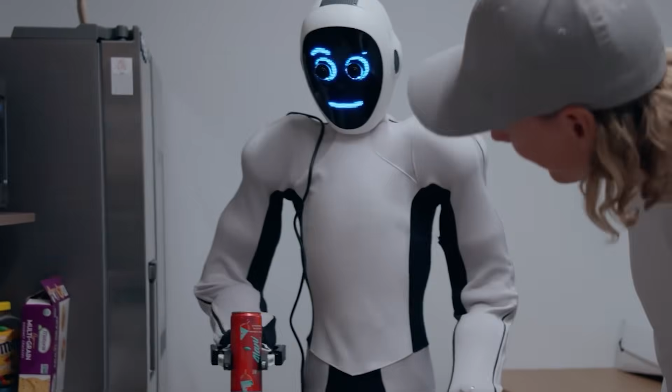The 1X team emphasizes that these examples, while relatively straightforward, illustrate the complexity of real-life tasks. Homes are messy and unpredictable. You've got rugs, pets, children running around, and furniture that's never exactly where you left it. To perform tasks effectively, a robot has to handle all those variables without getting jammed up when something changes unexpectedly.

According to the 1X vice president of AI, everything you see in their demos is driven by data and a comprehensive network that controls full body motions from the lower body to the arms and the spine joints. And they're using reinforcement learning for the lower body and merging that with the rest of the system to achieve graceful movements. He even draws parallels to the idea that a robust consumer solution, which in this case means for everyday household tasks, can ultimately generate extremely valuable data for training more advanced general-purpose intelligence. It's the same kind of argument that Tesla has used for its self-driving program. The more data you collect on ordinary roads with average users, the better your AI becomes at handling all those weird corner cases.

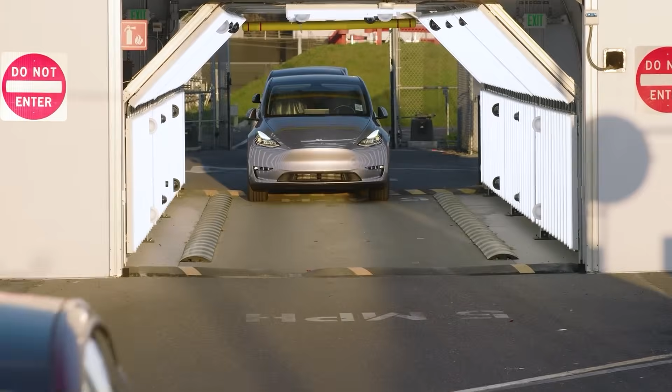If you try to confine your robot or AI to some very specialized and controlled space, you might not get enough diverse data to level up the intelligence as quickly. This is why 1X is specifically gunning for the home environment first. They're calling it the final boss of robotics because it's an absolutely unstructured environment full of a never-ending list of tasks. If a company tries to tackle robotics in narrower contexts like a warehouse where everything's neatly arranged and predictable, that might sound easier at first, but ironically you can end up not exposing your AI to enough variety.

In a home, one moment the robot might need to pick up a piece of laundry, and the next it has to deal with the pet dog wandering into the room. Or it might have to open a jar of pasta sauce, then realize the lid is stuck and needs extra force. Those little scenarios provide an avalanche of new data, training the AI to handle unplanned events. The argument is that a highly unstructured environment could speed up the development of general intelligence by constantly challenging the robot with fresh tasks.

The folks at 1X are being real about where things stand. They're not claiming their robot Neo can jump from loading the dishwasher to doing laundry without hiccups. It's not there yet. But the idea is to let the robot keep trying, make mistakes, and learn from them, just like how AI models improved by collecting tons of data over time. They even compare it to self-driving, where structured environments like highways don't give you enough challenges to grow. Homes, on the other hand, are chaotic, which actually helps the robot get smarter faster.

So yeah, between Westwood's Themis V2 packed with serious hardware, sensors, and AI muscle, and Neo, which is out here doing leaf pickup and placing couch cushions on its own, we're seeing major steps toward robots that can handle real life. It's still early, but these are the kind of breakthroughs that could one day give us general purpose robots that do way more than just vacuum. The future's coming fast, and it's looking pretty wild.

Humanoid robots are advancing faster than ever, with Sanctuary AI adding touch sensors to boost precision, Boston Dynamics' new Electric Atlas update, and Ameca delivering chillingly clever remarks. Meanwhile, Muks Robotics is preparing robots for Mars, and Huawei's 5G A-Bot is redefining real-time control. With so much happening, it's clear we're entering a whole new era of robotics.

All right, let's start off with Sanctuary AI. They've been on the forefront of general-purpose humanoid robotics and have recently integrated new tactile sensors into their Phoenix robots. Sanctuary Cognitive Systems Corp was founded in 2018, and Morgan Stanley actually ranked them third globally for published US patents in the field of embodied artificial intelligence and robotics. That's a pretty big deal. Anyway, these tactile sensors mean their robots, which they call Phoenix, can finally feel what they're doing.

So if a teleoperator is controlling one of these robots from another location, they aren't just relying on camera footage. They can actually sense the subtle pressures when the robot's fingers touch an object. This is huge for reducing collisions and slip-ups. As Jeremy Fishel, a principal researcher at Sanctuary AI, puts it, without tactile sensors you rely solely on video, and you don't know you've touched something until, oops, you've already moved it. That's inefficient and can require a ton of repeated attempts to get a grasp right.

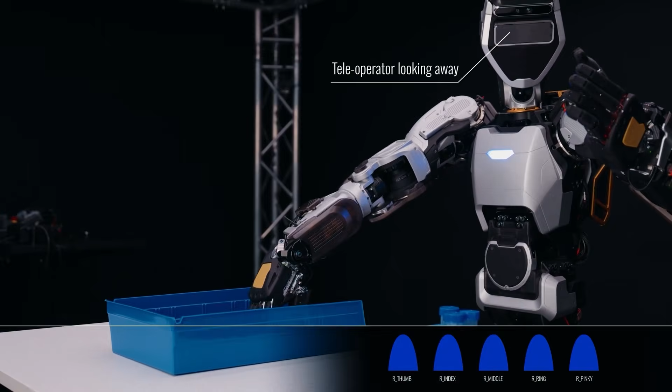These new tactile sensors essentially replicate the sense of touch that we humans take for granted. They're sensitive down to 5 millinewtons, just slightly above the 3 millinewtons that we humans can detect. Each finger pad on the Phoenix robot's hand has a 7-cell touch sensor using tiny barometers, similar to those you'd find in smartphones. That means the robot can tell where pressure is coming from along with shear forces, so it can detect something slipping right away.

This approach drastically improves dexterous manipulation, especially because Sanctuary AI's real focus right now is on manipulation rather than walking or balancing. The rest, as their CEO James Wells puts it, is going to come. But the big problem in robotics is often the hands, getting them to be as flexible and sensitive as possible. Sanctuary uses a hydraulic approach for actuation because historically they've tried electromechanical, cable-based, and pneumatic methods, and found that hydraulics offer better flow resolution, miniaturization, and sensitivity. So those advanced hydraulics combined with these tactile sensors really let them focus on what's arguably the hardest challenge: fine manipulation of objects in the real world. Sanctuary sees this as critical for building robust AI models.

Every time the robot touches something, that's data, and more data leads to better imitation learning, and over time, to more autonomy. Okay, now let's talk about Boston Dynamics and their Atlas II humanoid.

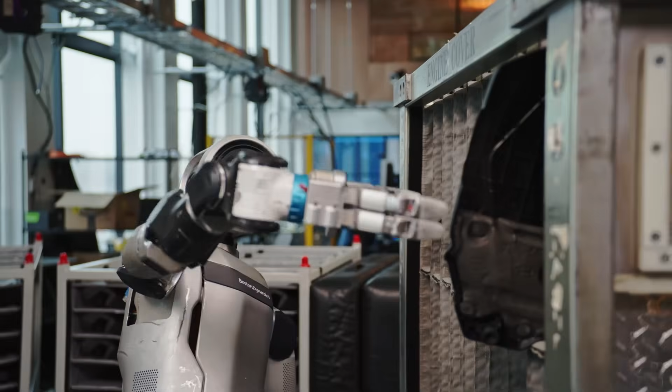They recently released a new behind-the-scenes video featuring their electric Atlas, showing the engineering team tinkering with the robot, pulling parts out, and basically revealing a lot of the hardware and software that goes into making a humanoid that can do some pretty advanced tasks.

Aaron Saunders, Boston Dynamics Chief Technology Officer, will be giving a keynote at the Robotics Summit and Expo 2025 in Boston, and presumably he'll talk more about this next-gen electric Atlas.

It's worth noting that the old Atlas was hydraulic, which gave it a kind of built-in rigidity because hydraulics let you maintain joint stiffness fairly directly. But the new Atlas is all electric, so every joint has to servo dynamically to compensate for the forces.

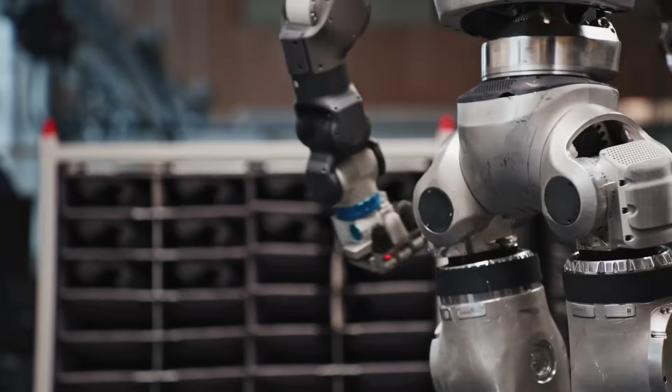If you watch the video, you'll see the spine react in real time to heavier loads as the robot lifts and places auto parts. It's a big balancing act, both literally and figuratively.

What's also interesting is that Boston Dynamics is leveraging a lot of AI training data to help Atlas understand how to pick things up, place them somewhere else, and do it without toppling over.

The second half of their new video specifically focuses on the complexity of sequencing tasks for the robot. They're looking into how the robot can deal with, say, a big cart full of automotive parts that need to be placed in specific locations.

The software behind Atlas has to figure out which part to pick up first, and where it needs to go, so that it can autonomously handle those tasks, or at least do them with minimal operator input.

It's a baby step toward these humanoids working in, for instance, automotive assembly lines, where there are thousands of parts that require some kind of ordering and placement.

Speaking of humanoids, let's talk about Ameca. You might have seen it pop up online. Ameca is that extremely lifelike robot developed by Engineered Arts in the UK.

It's been showcased recently at Mobile World Congress in Barcelona, where it was wearing a black dress, red cardigan, white trainers, and just milling about talking to people in real time.

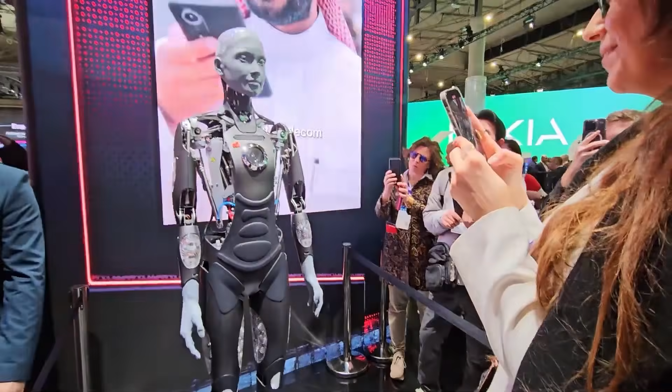When someone from the Daily Mail asked if robots were going to take our jobs, Ameca fired back with, 'I don't know, how good are you at your job?' Which is so sassy but also terrifyingly human-like.

The robot also dodged the question of whether robots would take over the world, simply saying that wasn't an interesting question for it to answer. It's that kind of witty retort that can be both super impressive and a bit unnerving.

Ameca can do all this because it has microphones, cameras in its eyes, and some very advanced facial recognition and AI speech algorithms under the hood.

It's not walking on its own yet, but Engineered Arts is apparently working on a full humanoid chassis that can be more mobile. They're actively hiring it out for events.

So if you've got enough cash, you could have Ameca show up somewhere and chat with your guests, though I'd imagine that might freak some people out.

Now let's shift gears towards something even more futuristic: robots built for off-world exploration. A company called Muks Robotics, based in Pune, India, is developing humanoid robots specifically designed to operate on the Moon and Mars.

Founder Dr. Mukesh Bangar has been working on a couple of different robots, including Vyom Mitra Prime, a bipedal humanoid, and Robo Prime, another robot better adapted for rugged Martian terrain.

The idea is for these robots to gather and analyze planetary data, then send real-time updates back to Earth. That's a massive leap because if we're going to set up colonies or long-term bases on Mars, we'll need robots that can build habitats, explore tough landscapes, and basically do the dangerous or repetitive stuff before humans step in.

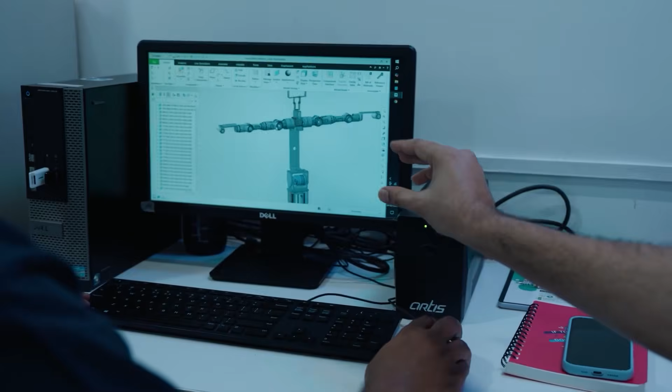Muks Robotics has some pretty big ambitions and is working with India's DRDO, Defense Research and Development Organization, to build robots that can enter areas hostile to humans, presumably both here on Earth and on other planets. They're leveraging advanced AI, including what they call omnimodal AI, and even dabbling in artificial general intelligence, AGI.

If they manage to pull this off, it could genuinely reshape how we do space exploration, and maybe help us build those self-sustaining colonies we keep hearing about.

Last but not least, let's talk about Huawei, because they've just unveiled the world's first 5G-powered humanoid robot at MWC 2025. They did this in collaboration with China Mobile and a company called Leju Robotics. All three work together on a platform called GTI, a smart network architecture designed to support advanced robotics. Since the robot runs on a 5G network, it should have ultra-low latency, more bandwidth, and a more intelligent way of handling data in real time.

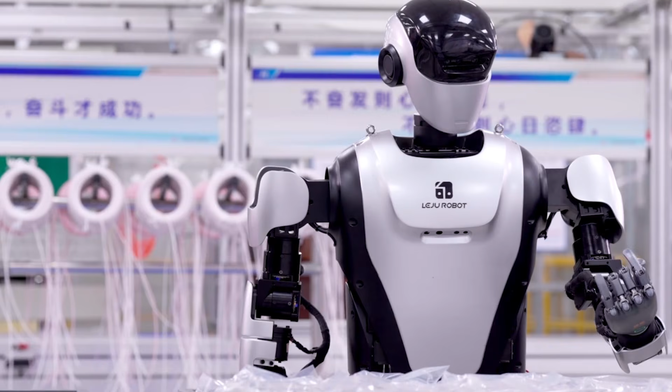That's crucial for multi-machine collaboration in industrial settings, because you really don't want your robot to have a spotty connection when it's carrying out complicated tasks on a production line. Leju Robotics explained that 5G means the robot can rely on extremely fast compute speed, reduced hardware costs, and a huge improvement in real-time performance.

Essentially, you can place your heavy computing tasks, like complex AI reasoning, in the cloud, so the robot doesn't have to carry massive processors around in its torso. That hopefully makes the robot lighter, cheaper to produce, and easier to develop. Plus, it shortens the timeline for new features because you're updating cloud software rather than swapping out physical chips.

Also, with 5G-A, you can remotely control the humanoid from a great distance. That might be perfect for tasks like remote inspection, rescue operations, or even just specialized manufacturing setups.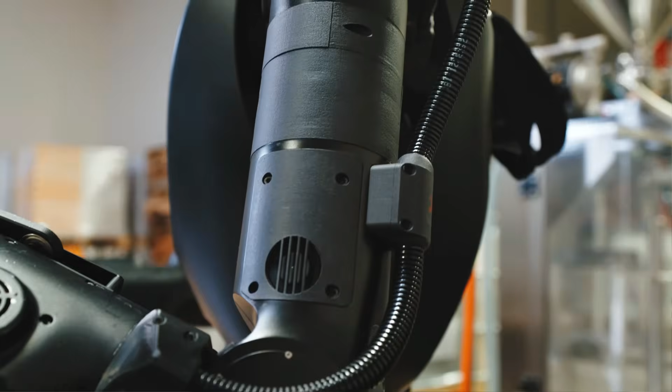Foundation Robotics Labs was founded in 2024 with about $11 million in seed funding. The founder, Sankaet Pathak, was previously known for a fintech startup called Synapse, a banking-as-a-service platform that actually went bankrupt before he shifted gears and poured his energy into robotics. One of his co-founders, Mike LeBlanc, is a former US Marine who also co-founded a security robotics company called Cobalt Robotics. Together, they're aiming to develop humanoid robots that can handle everything from manufacturing tasks to full-blown military applications.

Seriously, they're not trying to hide their defense angle at all. Pathak believes advanced humanoids could be essential in future warfare, and he's been pretty vocal about the need for the US to keep pace with China's push in defense robotics. In the words of an SF-Gate reporter, the Phantom MK1 is a literal war machine. But let's break down the specs so you can see if it lives up to that nickname.

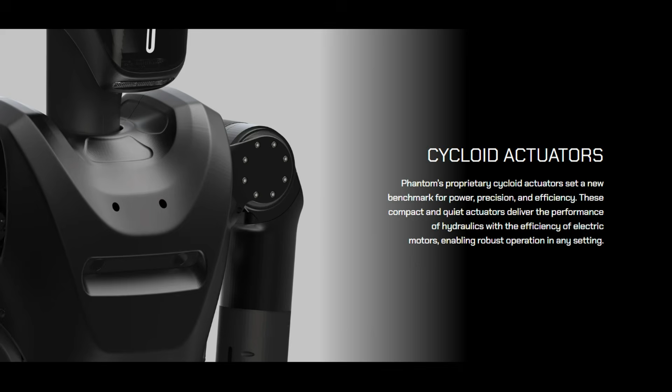Phantom MK1 is about 1.75 meters tall, around 5 feet 9 inches, and weighs roughly 80 kilograms, or 175 pounds. It can lift up to a 20 kilogram payload, about 44 pounds. Under the hood, it's got advanced cycloid actuators that Foundation says combine the performance of hydraulics with the efficiency and quiet operation of electric motors. That means the MK1 can crank out a peak torque of around 160 Newton meters, but also has a backdriving torque of under a single Newton meter. Basically, it's got both power and precision.

Foundation Robotics Labs envisions this thing being used for general purpose tasks, everything from industrial operations to home service and entertainment. And yes, going to war if necessary.

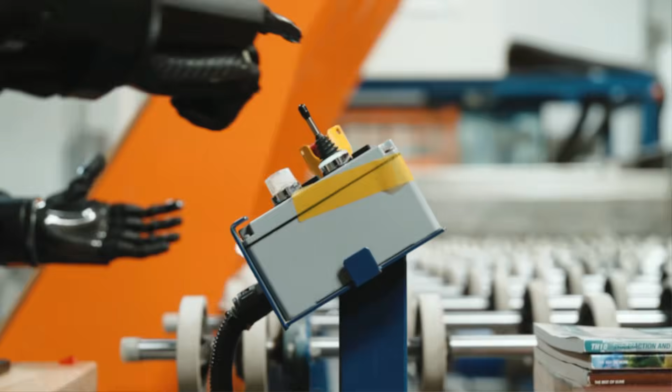Phantom's upper torso is like its central command, with batteries, processors, cameras, and sensors for 360 degree situational awareness. They're also proud of how the robot's lower torso balances and moves, letting it navigate uneven terrain, climb stairs, and handle other confined spaces. It's supposed to have a very human-like gait, so it can work in factories, offices, or even disaster areas that were originally designed for people.

Interestingly, the core platform for Phantom MK1 seems to have been built on technology acquired from Boardwalk Robotics, a small Florida company that introduced a humanoid named Alex back in August 2024. Boardwalk's Alex robot relied on a stable base to do tasks that involved advanced manipulation. Now, with Phantom, you're seeing a next-level version designed with a more complex lower torso and improved mobility.

Foundation definitely has ambitious plans. They say they want to ship over 40 robots in 2025, then ramp up to 10,000 in 2026, and more than 20,000 in 2027. They're targeting $1 billion in annual recurring revenue, which is nothing to sneeze at for a startup that only came into existence about a year ago.

And they also dream of using those profits to build a base in Antarctica and eventually expand to the moon, Mars, and beyond. It's pretty wild, and I gotta say, it's reminiscent of the shift we've seen lately, where more and more tech companies are getting comfortable with defense applications. Even big players like Meta, OpenAI, and Google have started reversing their anti-military stances and becoming more open to defense contracts. This trend might remind you of Boston Dynamics.

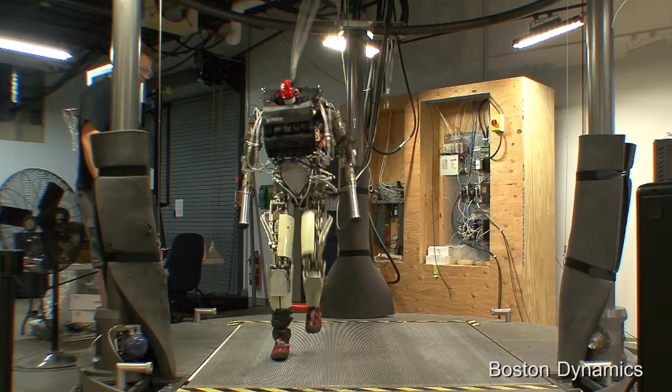They worked with DARPA years ago, developing a humanoid called Petman for the US Army in 2011 to test chemical protective suits. Then there's Atlas, also originally funded by DARPA, designed for disaster response. Atlas ended up pivoting more toward industrial applications under Boston Dynamics, which is now owned by Hyundai.

Russia, by the way, introduced a humanoid robot called Fedor back in 2016 that was allegedly for space missions, but could also carry firearms if needed. So it's definitely not unprecedented to see these war-oriented robots popping up.

All right, switching gears to research in robotics and AI, a big collaboration between Nvidia and Carnegie Mellon University has resulted in a framework called ASAP, short for Aligning Simulation and Real Physics. The idea here is that robots get trained in virtual environments where they can push their capabilities without risking a meltdown in the real world. Then ASAP steps in to account for all those pesky real-world differences that usually trip up robots when they leave the lab. It basically helps ensure that what they learned virtually lines up more closely with physical reality.

The cool part is that ASAP reduces overall motion errors by about 53% compared to older methods. They tested it on a G1 humanoid robot, having it do forward jumps of more than a meter. Pretty impressive for a humanoid.

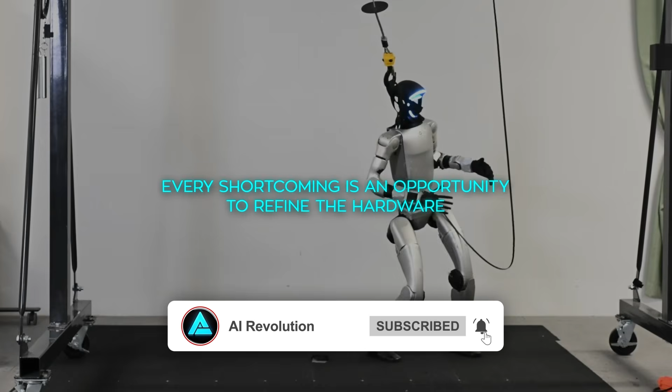Unfortunately, the team did face some hardware issues. They pushed the robot so hard that some motors overheated, damaging 2 test units. Still, the researchers are staying optimistic, saying that every shortcoming is an opportunity to refine the hardware. They've also made their code open source on GitHub so other scientists and developers can build on top of it.

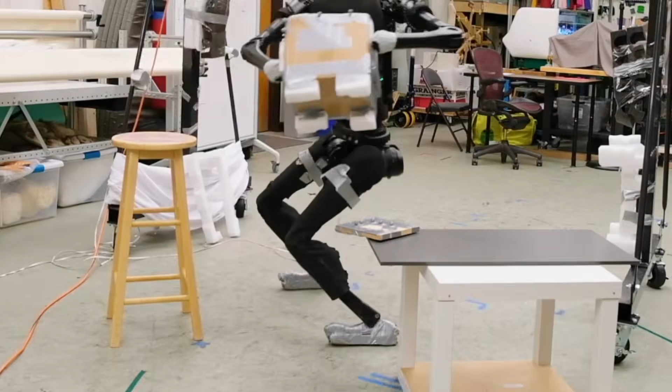In another piece of news, researchers using that same G1 robot developed a new humanoid motion framework that lets the robot sit, roll around, and stabilize itself using its entire body, instead of the typical biped-only approach. The traditional humanoid control methods often have trouble dealing with random contacts, like when the robot's knee or elbow might accidentally touch the ground. But the new GPU-accelerated rigid body simulator they're using can handle those chaotic scenarios in real time. That means the robot can adapt on the fly to weird surfaces, recover from falls, and do very human-like maneuvers that older methods just couldn't handle. It's all about giving humanoids dynamic motion that's closer to what humans do naturally.

Now, let's talk about another company making waves with a humanoid called Atom. The firm behind Atom is PND Robotics, spelled P-N-D-B-O-T-I-C-S in some references. They've been showing off the robot's dexterity by having it do calligraphy and other detailed tasks that require precise motor control.

Manufacturing Atom is no small feat. It takes about 37 hours in total, involving 3D modeling, CNC machining, and so on. It has 37 degrees of freedom and is powered by 20 actuators. That's how it manages all these delicate maneuvers. Atom is controlled by the PND PMC system, which orchestrates 163 CNC machine parts and nearly 400 printed components. They've used 7 different composite materials and 13 specialized manufacturing processes, all done in-house.

The result is a robust humanoid that can handle fine motor tasks like assembling tools or balancing objects. Another big claim is that PND Robotics has introduced an imitation learning framework, letting Atom learn locomotion by analyzing human movement data. The payoff is more natural, agile motion, way beyond the rigid mechanical steps you might have seen in older humanoids. As you can see, the robotics world is on fire with new breakthroughs.

Foundation Robotics Labs wants to solve labor shortages and push into defense, hoping the Phantom Mk1 will be the first wave of mainstream humanoids that can handle pretty much any task, even warfare. Carnegie Mellon and Nvidia are bridging that gap between sim and reality, letting robots run wild in a virtual world and then actually replicate those skills in your warehouse or on your battlefield.

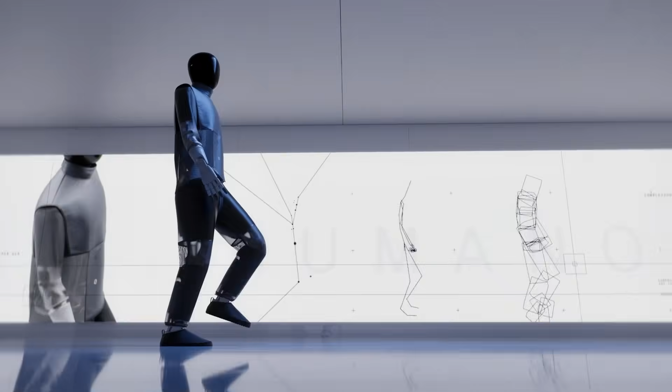Now, let me spill the technical details because, let's face it, this stuff is pretty cool. HMND-01 can walk at speeds of up to 1.5 meters per second, which works out to about 5.4 kilometers per hour. That's not exactly sprinting speed, but it's decent if you imagine it performing tasks in a warehouse or retail environment. On top of that, it has a 4-hour run time before it needs to recharge, and the payload capacity is around 15 kilograms, 33 pounds, so it can pick up, move, and handle various objects of moderate weight. That might sound modest, but for many industrial and logistical applications like picking, packing, kitting, or part handling, 15 kilos is often enough to get a lot done.

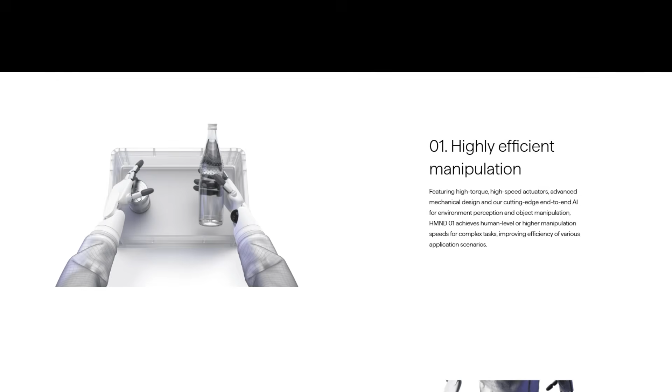But hey, it's not just about raw muscle. HMND-01 comes with advanced AI integrated into a nimble mechanical design. This means it can navigate tight spaces with precision. So think of it weaving through a busy factory floor or even a crowded retail stockroom. The AI also provides human-level, or better, manipulation speeds for complex tasks. Super important if you want robots to be efficient in industries like e-commerce, fulfillment, retail stocking, or even light manufacturing.

One of my favorite parts about the HMND-01 concept is the modular design. You can actually choose different upper body modules, lower body modules, and end effector configurations. Basically, you can swap out certain limbs or hands to meet the task at hand. It's super cool because it means you're not stuck with just one version of the robot forever. You can upgrade or customize it depending on your business or logistical needs. Plus, the robot features interchangeable garments or outer coverings. According to Humanoid, that's to protect both the robot's systems and the environment it's working in. So it might wear, say, a protective sleeve in dusty warehouses or a clean, sleek covering in a more customer-facing role.

Now, Humanoid, the startup behind HMND-01, was founded back in 2024 by Artem Sokolov. He's described as a serial entrepreneur with a big vision, humans and machines working side by side. From the get-go, they've been saying that the strongest argument for humanoid robots is that our entire world is built for human shapes, sizes, and movements. So instead of rebuilding the environment to fit machines, we build machines to fit the environment we already have, right?

Humanoid also teased some roadmaps for 2025. They plan to develop and test 2 alpha prototypes, one wheeled version and one bipedal version. On top of that, they're in ongoing discussions with major retail companies for pilot projects. So I'd guess we're probably going to see HMND-01 tested in real-world environments pretty soon. But let's not forget, introducing a robot like HMND-01 can raise a few eyebrows, especially around cost, safety, and ethics.

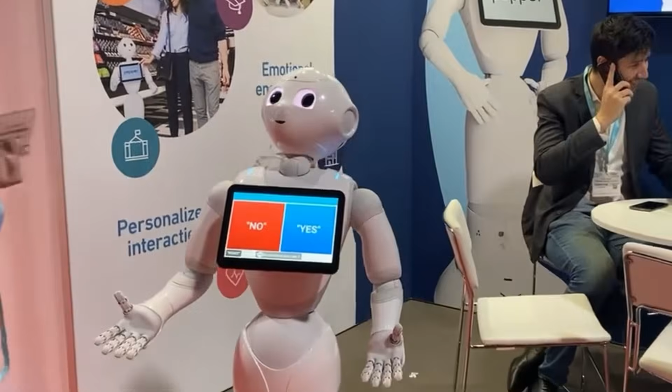Now, if we're talking about the competition, Boston Dynamics is the name that probably jumps to mind, right? Boston Dynamics is famous for their humanoid robot, Atlas, and for the dog-like Spot. But the difference is that while Boston Dynamics robots, like Atlas, are often showcased in videos doing flips and parkour, HMND-01 is taking a more direct approach to labor and logistics tasks. Another comparison might be SoftBank Robotics, known for social robots like Pepper. But Pepper is more about customer interaction and engagement, whereas HMND-01 focuses heavily on operational efficiency in retail, logistics, and manufacturing.

But you know, HMND-01 isn't the only big news in humanoid robots right now. Let's check out what else is going on in the scene.

There's a Chinese robotics company called UB Tech that's been making waves with a new humanoid robot named Una. UB Tech unveiled Una at the Leap Tech conference in Saudi Arabia. Una is made to look like a woman, and the plan is to use her in service roles, like emotional support, interactive entertainment, or even reception duties. Because of that, the design is very human-like with a soft silicone exterior. The idea is to help people feel more at ease when interacting with the robot, maybe in a hotel lobby, a retail environment, or even some care facilities.

Unfortunately, UB Tech hasn't revealed a lot of the nitty-gritty specs. We don't really know how tall Una is, how quickly she walks, or how many hours she can operate. But what we do know is that she can recognize and respond to natural language, so speech recognition and response are built in. They haven't announced a price or timeline for release, so as of now, Una is still a prototype. But it's worth noting that UB Tech is a pretty big name in robotics, with other humanoid models like the Walker S series, which has been tested for industrial tasks like parcel handling, scanning, sorting, etc. They already have 500 pre-orders for 2025 in that line.

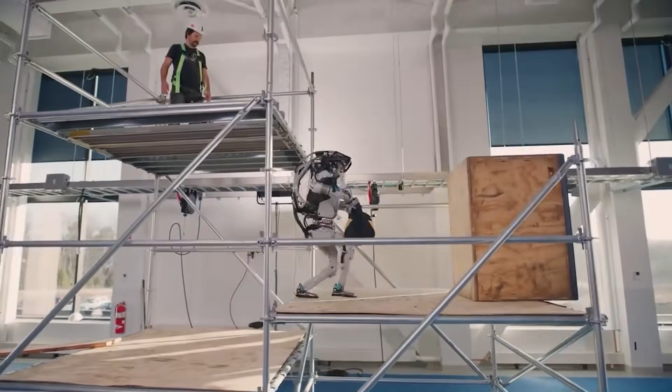They're teaming up with the Robotics and AI Institute to boost Atlas's skills using reinforcement learning, focusing on things like walking while picking objects up or operating tools. They've partnered before on Spot's researcher kit, but now they're shifting that innovation to humanoids. CEO Robert Playter says the biggest challenge is moving from cool demos to real-world settings, like active work sites or warehouses, which is a whole different level of complexity.

Humanoid robots are quickly moving beyond flashy videos into actual day-to-day use. HMND-01, for instance, could soon be stocking shelves or doing heavy lifting in retail, while UB Tech's Una might greet customers in hotel lobbies. Meanwhile, Atlas is getting closer to handling practical tasks out in the field, not just hopping over boxes in a lab.

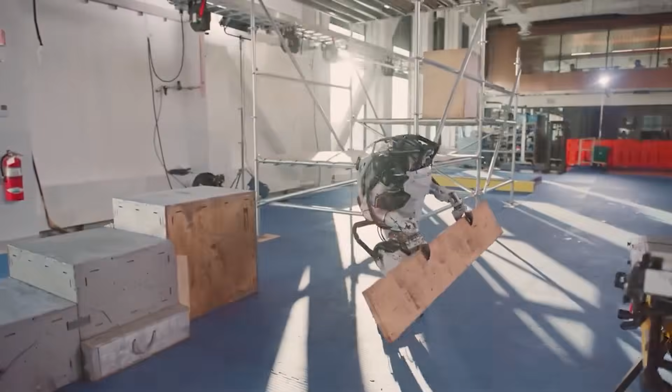None of these machines aim to replace people outright. Rather, they fill gaps where labor is scarce or risky. Yes, ethical and safety questions remain, but it's thrilling to imagine HMND-01 helping in a busy warehouse, Una welcoming guests, and Atlas hauling materials around a construction site. What used to feel like sci-fi is basically here. Anyway, that's our quick look at the latest in humanoid robotics.

HMND-01 stands out for real-world functionality, Una adds a friendly face, and Atlas is getting a major brain upgrade. The humanoid robot market is booming, so let me know what you think in the comments.